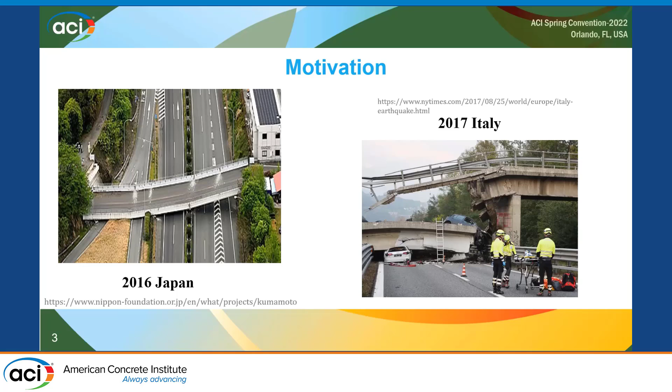Now, our current seismic design philosophy is based on 2 things. One is failure - if we see a bridge collapse, we call it a failure. And if we see that a bridge is not collapsed, it sustained major damages but didn't collapse, then we can call it a success.

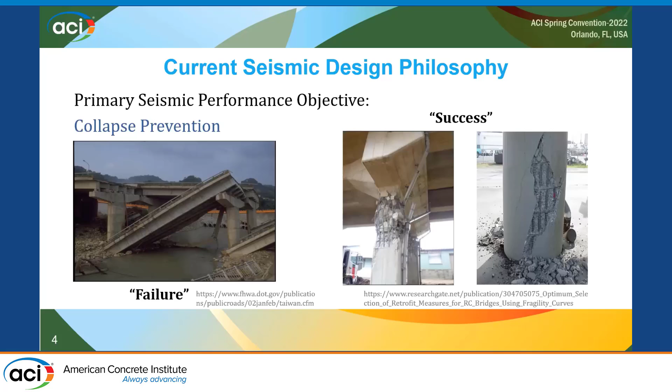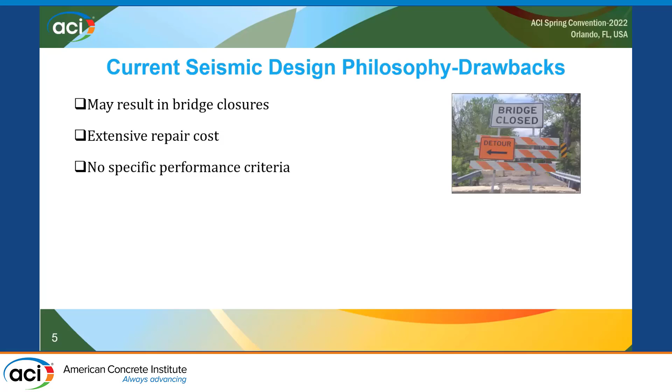But there are some drawbacks to this philosophy. If we see there is no collapse, but there are some major or minor damages, we are calling it a success, but it might result in bridge closure or extensive repair costs. And we don't have any specific performance criteria for this.

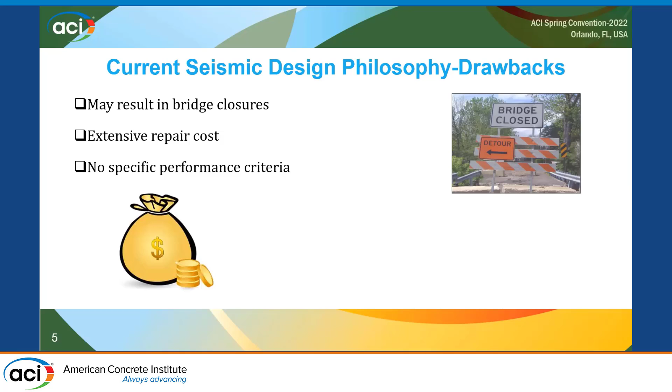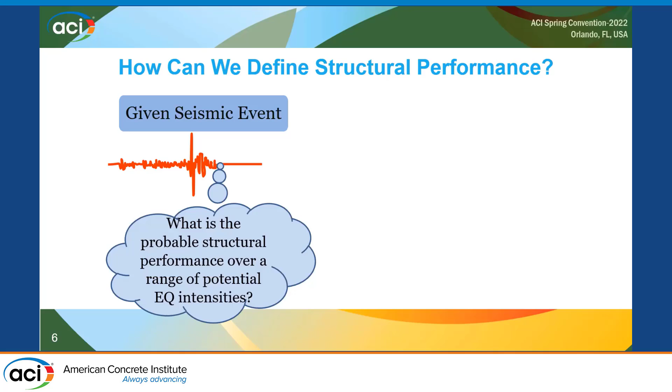So how can we define the structural performance of a structure that is not a consumable product? With the current design philosophy, we can only evaluate it after an earthquake, but we need specific, measurable, and attainable criteria for evaluating the performance. That's the idea of this research.

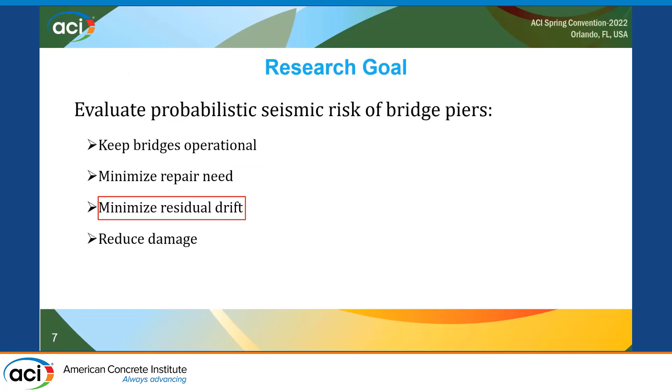So our research goal is to evaluate the probabilistic seismic risk of bridge piers, so that we can keep the bridges operational and minimize the repair need, and most importantly, minimize the residual drift, and finally reduce the damage, as we can see here.

So how did we achieve this goal? We used an innovative or smart material, the shape memory alloy bars. This has 2 properties: one is the shape memory effect, and the other is the super elasticity. I think we all know about this innovative material.

SMA bars, or shape memory alloy bars, have the unique ability to undergo extensive deformation, and the deformation retreats back to its original position upon load removal. That's why shape memory alloy bars can be a strong contender to be used as reinforcement in bridge piers.

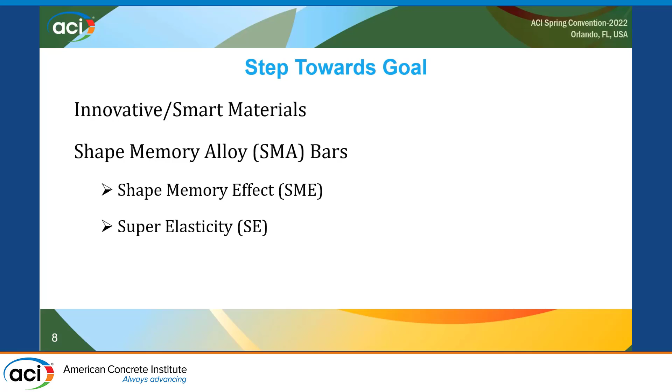Now, shape memory alloys have 2 different states. One is the Martensite state, which is the low temperature, high stress state, and the other state is known as austenite, that is the high temperature, low stress state. I'm going to describe these 2 states here.

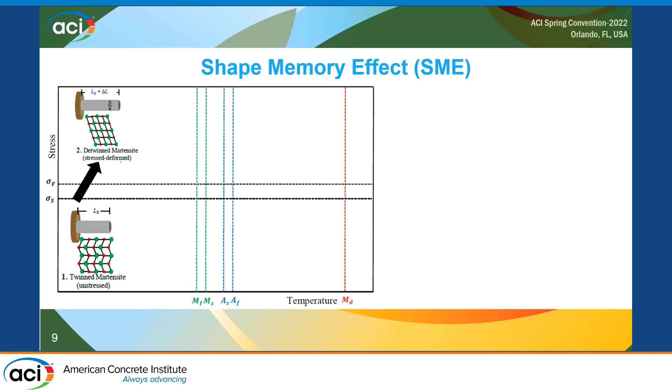In the first figure, we can see the twinned martensite state when the bar is unstressed. If we put on some stress, it turns into step 2, detwinned martensite, and the shape is deformed. When the stress is removed, it turns back to detwinned martensite and the deformed state.

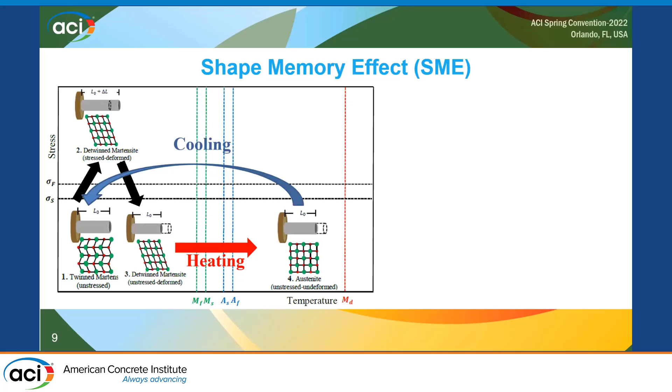Now, what happens when we heat this specimen? It turns into the austenite state, which is the high temperature, low stress state. And when the heat is removed or it is cooled, it goes back to its initial state, state number 1, martensite state. So in this figure, we can see there is no residual deformation - it has turned into its original position.

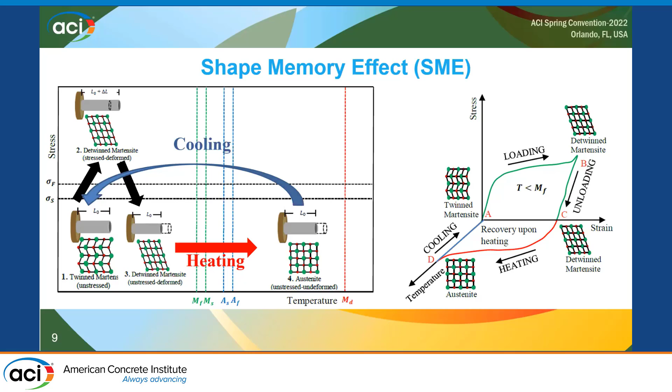We can see it here. After loading, it goes to point B, detwinned martensite state, and when the load is removed, it comes back to point C. After applying heating, it returns back to its original position in the austenite state, and after cooling, we can see it turns back to position A, which is its original position with no permanent deformation.

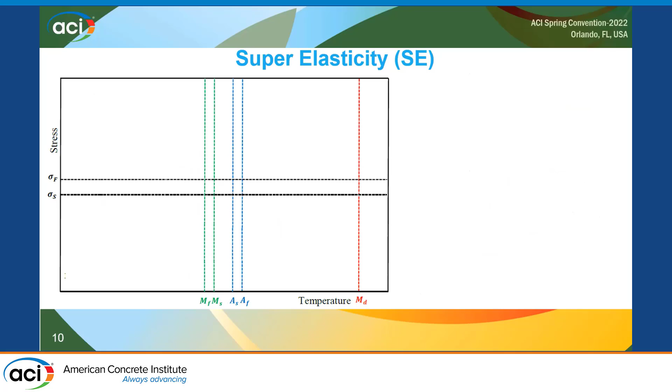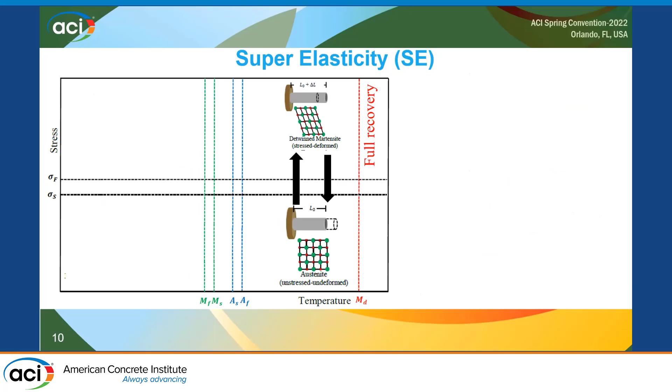And here we are explaining the superelasticity effect. It happens without any impact of temperature. At first, at high temperature, it is in the austenite state. After applying some stress, it goes to the martensite state, and again it returns back to the austenite state. So there is full recovery of the stress.

And we can see there is no permanent deformation again. So why are we using SMA? Here we can see the comparison between the traditional or conventional steel reinforcement and the SMA reinforcement. We all know that steel always has some permanent set after load removal, but from this second figure, we can see that SMA does not have any permanent deformation, which is very good for the structures. Even it can return back to its original position after applying 8 to 10% of strain.

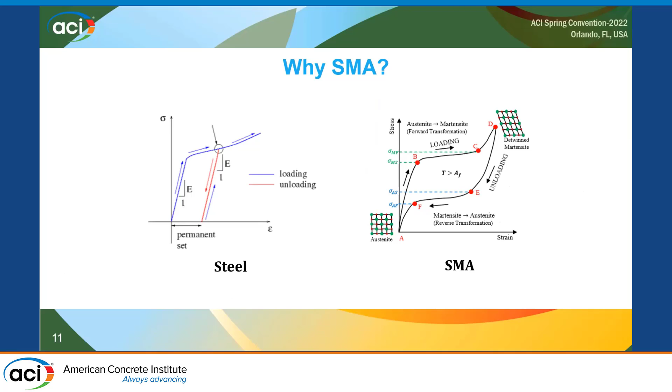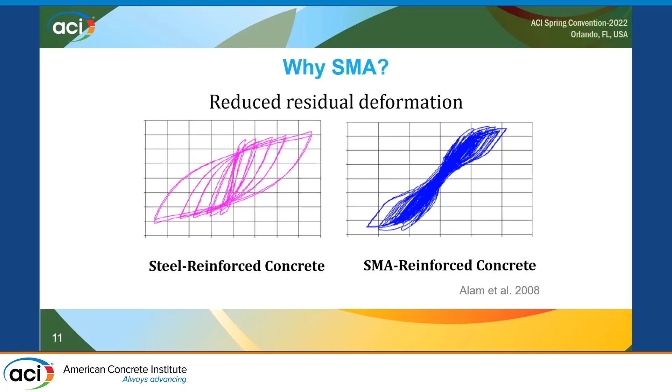And instead of using traditional code-specified design level earthquakes, here we use 3 types of earthquakes. Number 1 is the shallow crustal earthquake. The second one is the mega thrust interface earthquake, and the third one is the deep in-slab earthquake. So we didn't go for the code-specified earthquakes, and the bridge is assumed to be located in British Columbia, Canada.

And then next, the performance was assessed by performing IDA, that is the incremental dynamic analysis, and we recorded the maximum and residual drift for each of the motions.

And here we use 5 different types of SMA bars. I'm going to show the different types of SMA bars in the next slide.

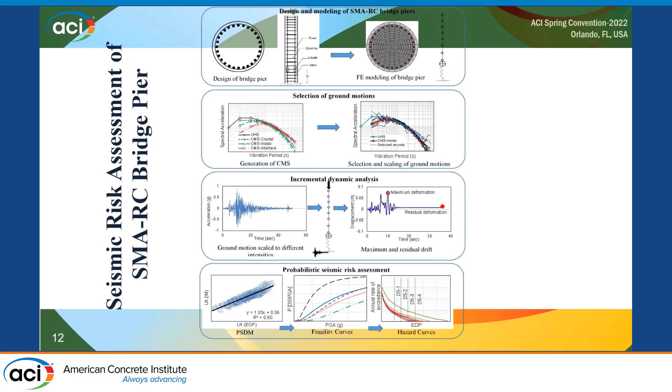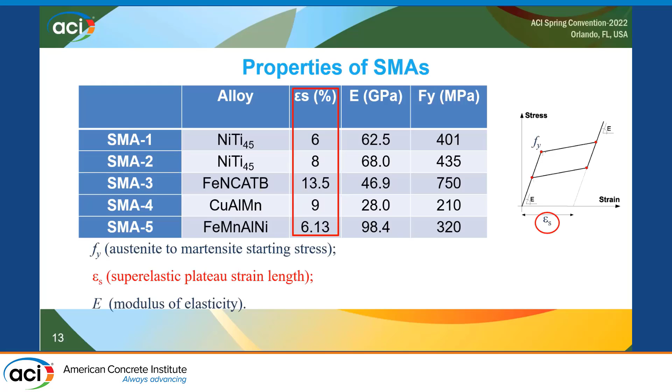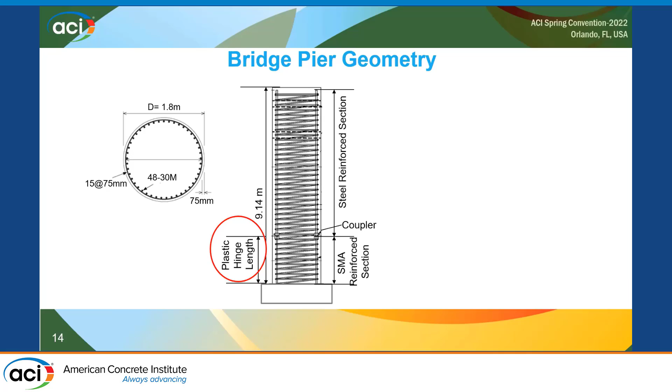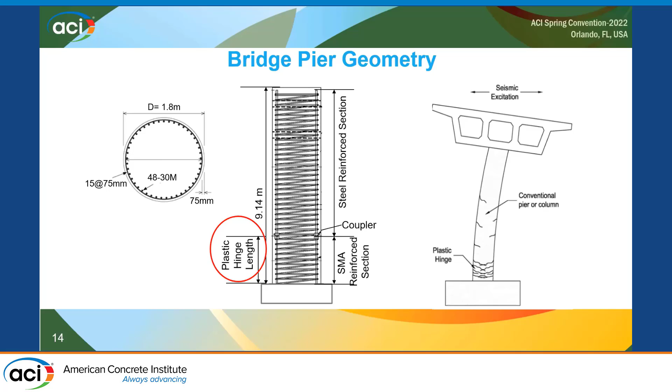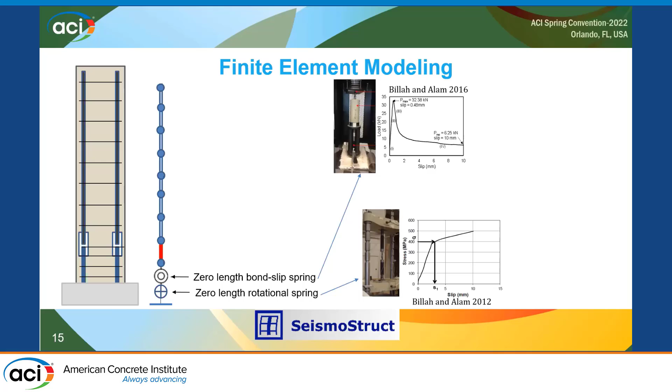So for the finite element modeling, in the bottom, we are providing zero length rotational spring, as we can see. And in the red portion, we can see the inelastic beam column element of the shape memory alloy RC section. And on the top, we can see the steel RC section.

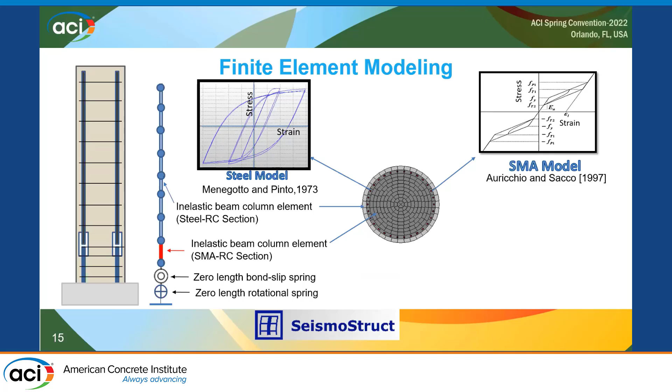The steel model was adopted from Menegotto and Pinto in 1973, and the shape memory alloy model was adopted from Auricchio and Sacco in 1997, and the concrete model was from Mander et al. 1988.

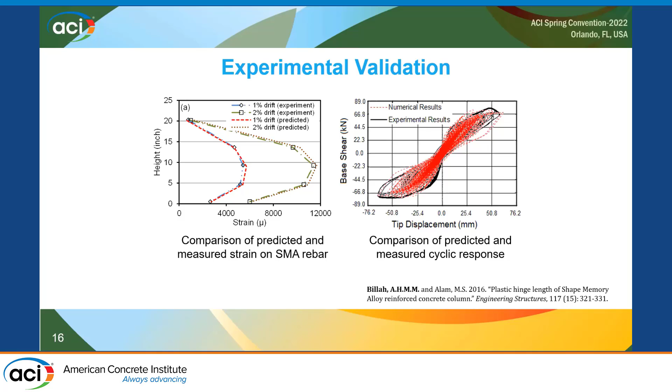The ground motions are selected by developing a conditional mean spectrum, CMS, for the three different types of earthquake scenarios, as mentioned before.

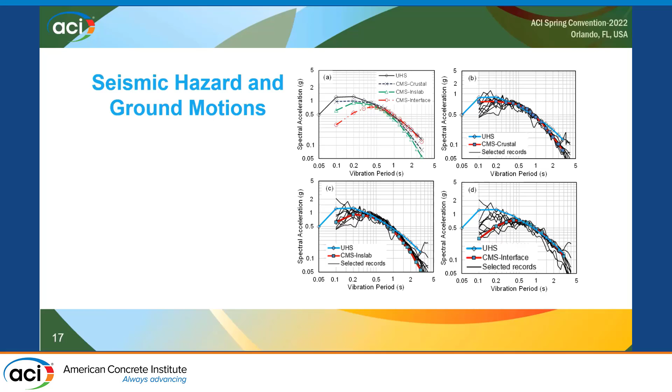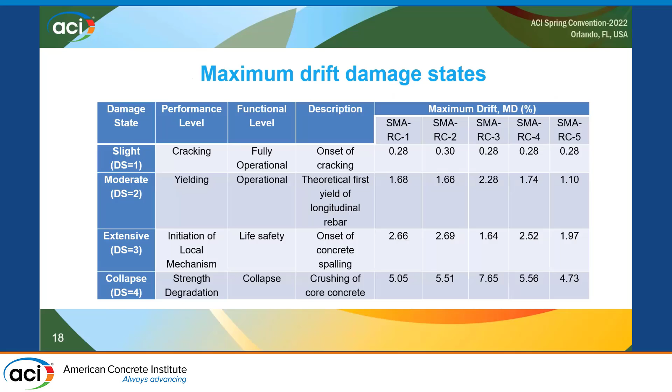As mentioned before, we use four types of damage states, referred to as DS. DS1 is cracking, DS2 is yielding, damage state 3 is the initiation of spalling, and DS4 is total collapse.

This can be attributed to SMA-3 having the lowest drift limit before entering the spalling damage state. This might be the reason for this.

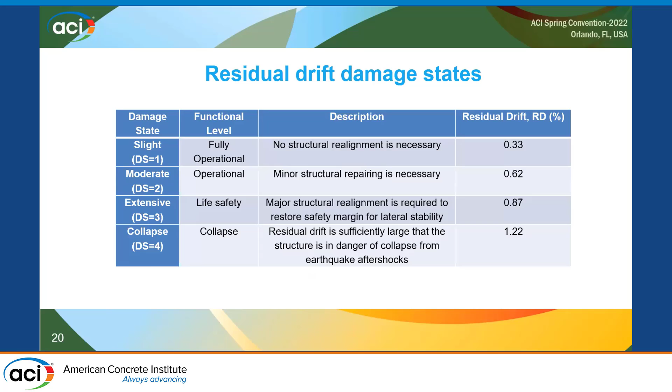This can be attributed to the higher recovery strain of the SMA-3 bar.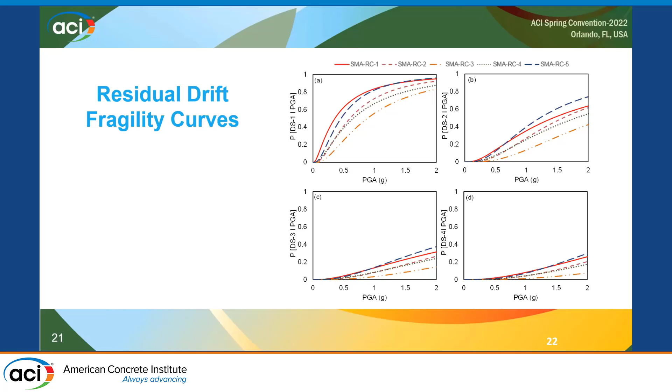From this figure, we can also see that none of the bridge piers showed 50% probability of exceeding damage state 2, shown in figure b. We designed the bridges for damage state 2, so that's why I'm mentioning this. We can see that the bridge piers are performing according to the design performance criteria.

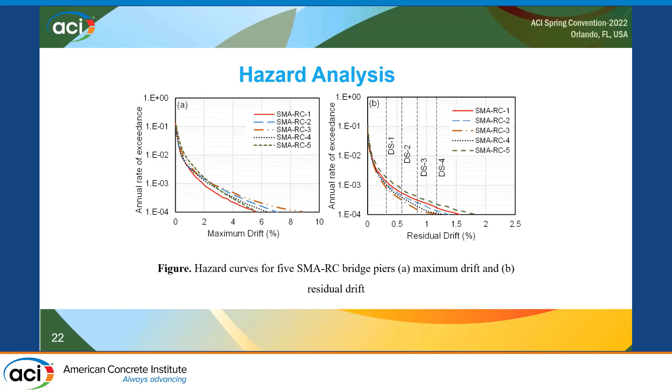Here we show the hazard analysis of the bridge piers in terms of maximum drift and residual drift. We can see the annual probability of exceeding different damage states for the different SMA-RC piers on the right figure. The vertical dashed lines show the 4 types of damage states and the probability of exceeding them in terms of residual drift.

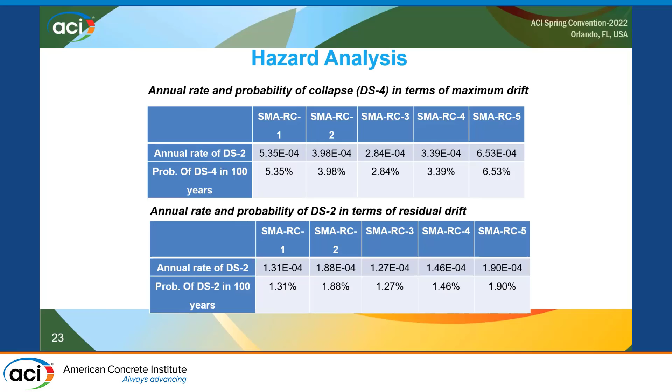To conclude, the impact of different components on the probabilistic seismic demand model and the fragility of the bridges were evaluated in this study, leading to the following conclusions. First, recovery strain significantly affects the seismic fragility and risk of the SMA-RC bridge piers in terms of both residual and maximum drift. All the SMA-RC bridge piers exhibited very low probability of collapse in terms of maximum drift. Considering residual drift, SMA-3 outperformed all the other bridge piers at all damage states.

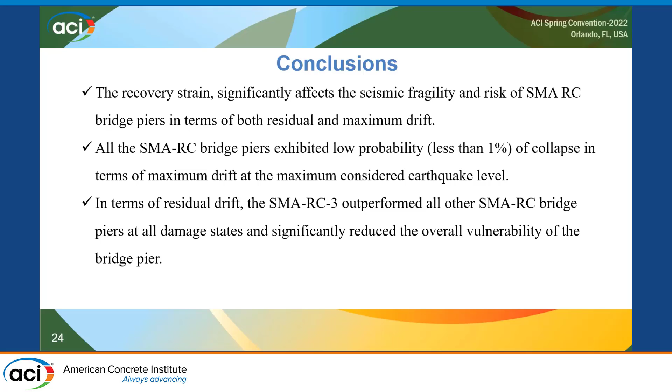But SMA-5 had the highest probability of exceeding damage state 4 and also damage state 2, as shown in the graphs before. So to conclude, SMA-RC bridge piers will have the minimum annual loss and provide significant financial benefit in the long run, because they have very low probability of damage.